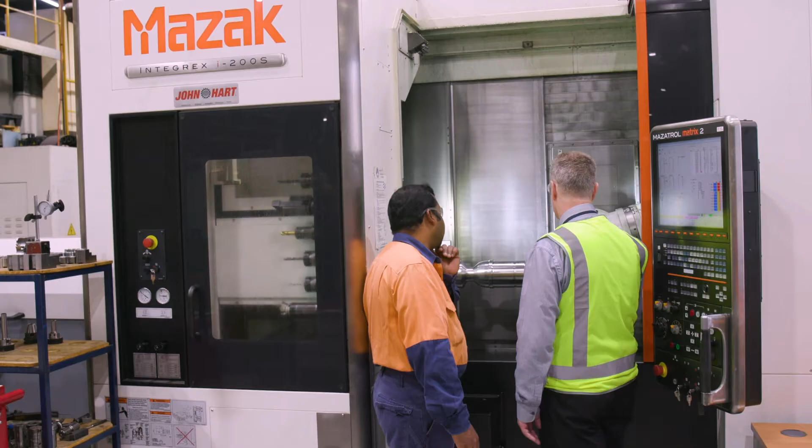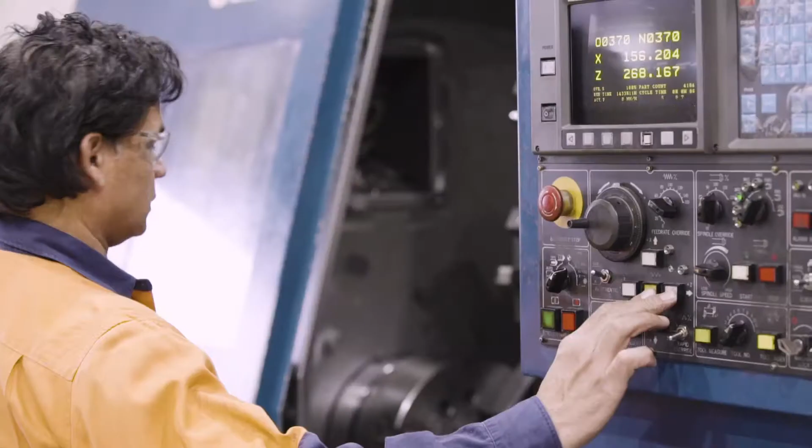Michael Borsche, the Managing Director of Amiga Engineering. We started in 1988 and we were primarily a traditional machine shop doing work for the heavy transport industry, and that developed into doing work for the oil and gas industry.

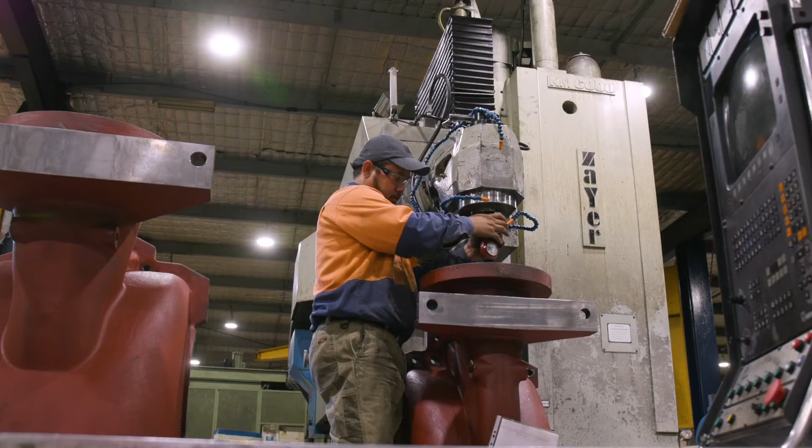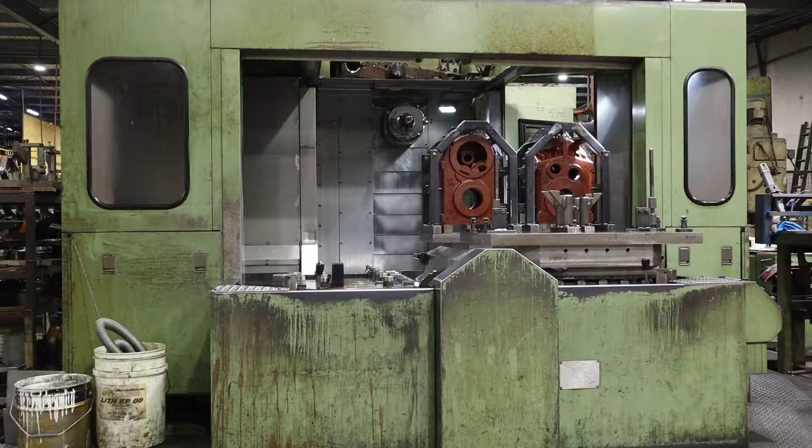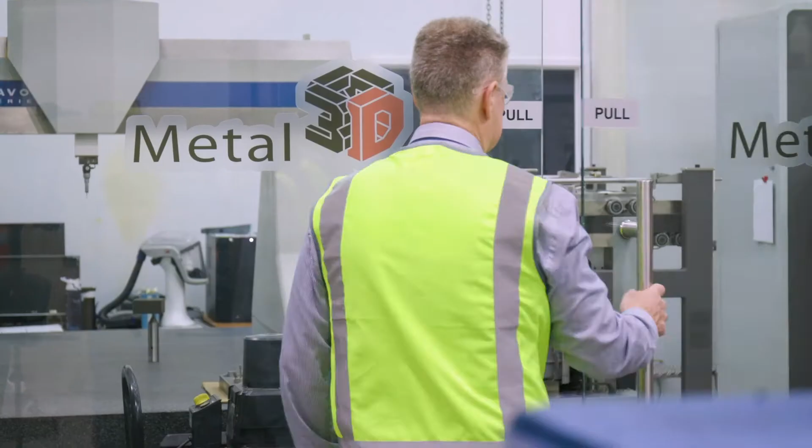And along with that we got into CNC machining and eventually built ourselves up to owning our own factory and growing. We then said, well, what's next? So we got into 5-axis machining, and on top of that we sort of said, well, what's next? And then evolved into doing 3D metal printing and now polymer printing, and now we're into reverse engineering and scanning.

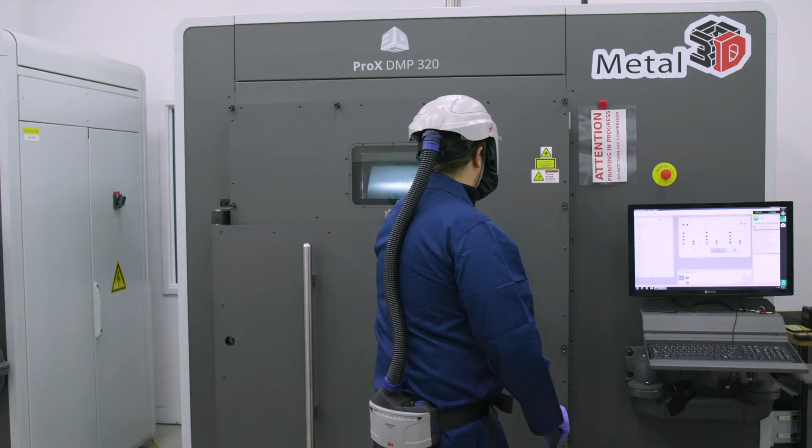Well, it's interesting. 3D printing has changed our business in a lot of ways. We were hoping it would attract a new level of clientele, and this has brought in designers and engineers more focused on what we're doing. But along with that, of course, comes a new level of quality, because you've then got to measure these complex parts. But the 3D printing in metal was certainly a great add-on to the business, and being basically the premier service bureau in Australia for metal printing, it's brought a bit of light on the business and helped us grow.

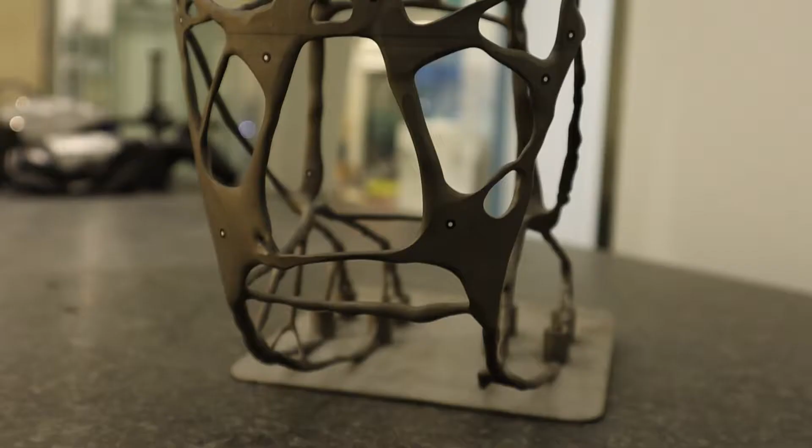Now, 3D printing being a complex technology, it's certainly made us think more about all the processes involved, and that's highlighted the ability to measure some of these complex parts. Originally, some of the earlier 3D printed parts were quite simple, but as designers were able to open up and free their minds to complex parts, multifunctional parts, so more parts in one that can do various things, it seemed to me that we needed to find new ways of measuring these parts.

Lots of curves, faces and underlying ledges and very intricate detail. Suddenly the standard measuring instruments weren't really enough. Micrometers and verniers didn't cut it. Our CMM, even which we've had for a number of years, we struggled to measure some of these complex parts, and in fact we would spend a long time programming, and we needed fairly skilled operators to run the CMM to measure some of these parts.

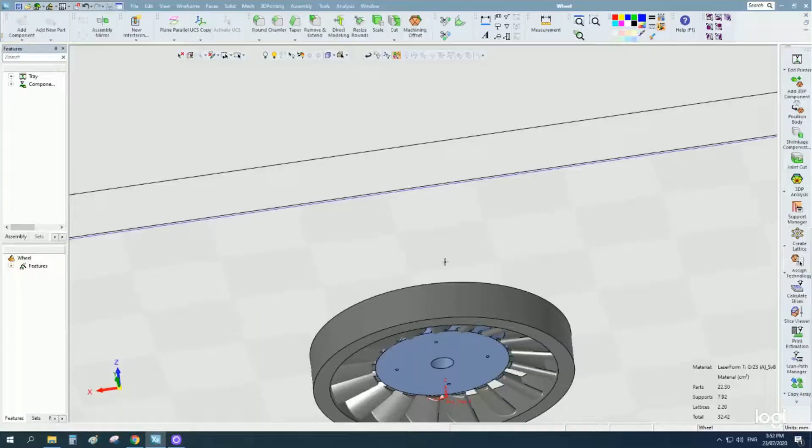Now, really the programming time is just too long, it takes a long time to get it all operational. It could be anywhere from hours to half a day, even days. We had a turbine blade recently, which we were trying to measure, and it got very, very out of hand. A lot of detail and underhanging ledges. This certainly highlighted the fact that we needed to find a better solution.

Well, really, I've watched the evolution of scanners over the years, and I've found them to be a little bit wanting. There's arm scanners, there's probes and digitisation of those, and the add-ons of laser scanners and that sort of thing, and that's been quite good. But really, to do something at a level of getting enough feedback and data for machining purposes at high level, high tolerances, it hasn't been there.

But now we've come across the ATOS Q, which has only just been released worldwide, and we're the first ones in Australia to actually get one. We've found that this is just amazing. It's down to 6 microns we can measure to, so that's really highlighted to me this is the time to get into this, and we can use it for everything we do within the business.

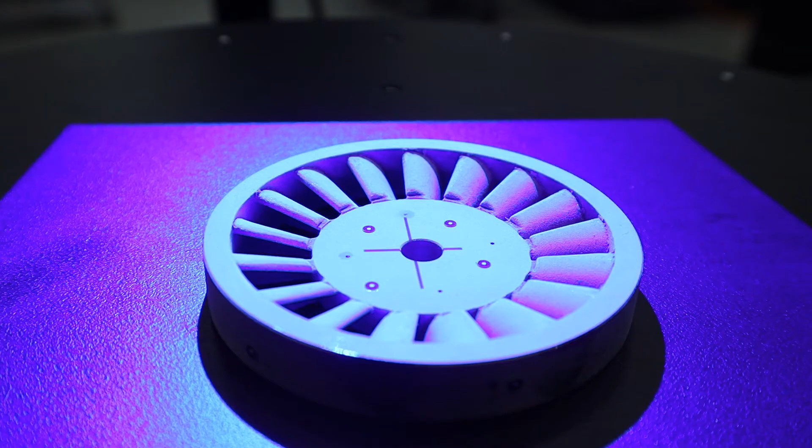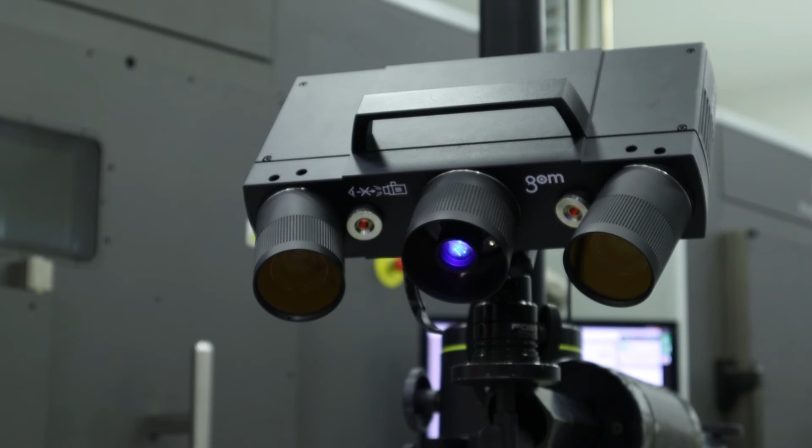Well, really, being a world first and being first in Australia was one reason to get the ATOS Q, but we were looking really for its level of accuracy, and this to me wasn't really available until the ATOS Q came out. And the ease of use, you know, I've looked at CMMs and the complexity of them, the training you need to get to an advanced level to be able to use them well. And with this ATOS Q, it's really simple. Within a few minutes, you've got a part measured, and the level of detail you get is just second to none. You'd hardly get it from the CMM.

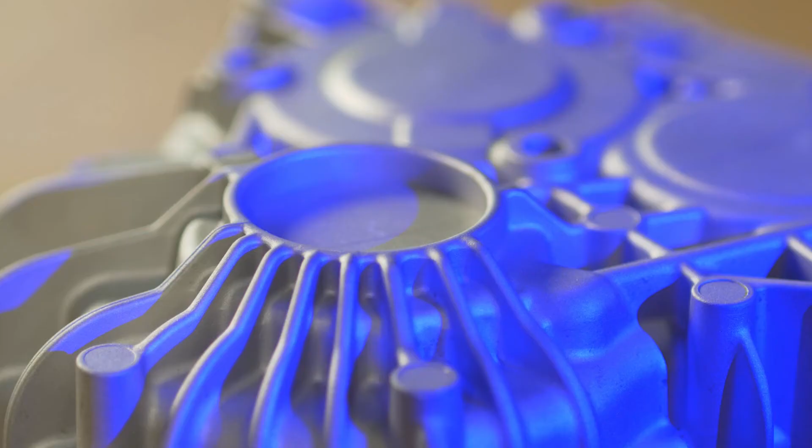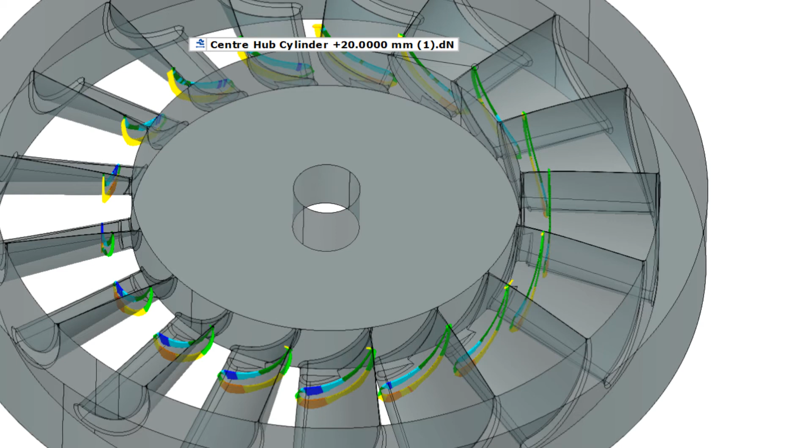We just started developing a small jet turbine engine, and as part of that, we 3D printed this part here, and scanning of the aerofoil shapes within this part certainly helped us get to the end result we needed. Previously, trying to use a CMM to measure these little blades and the curved sections and the aerofoil design of the whole part was virtually impossible. Certainly on something this small as well. Even if you machined this on a 5-axis machine, you wouldn't get the level of detail you've got in the corners and the fine edges on here. Not impossible, but very hard to do.

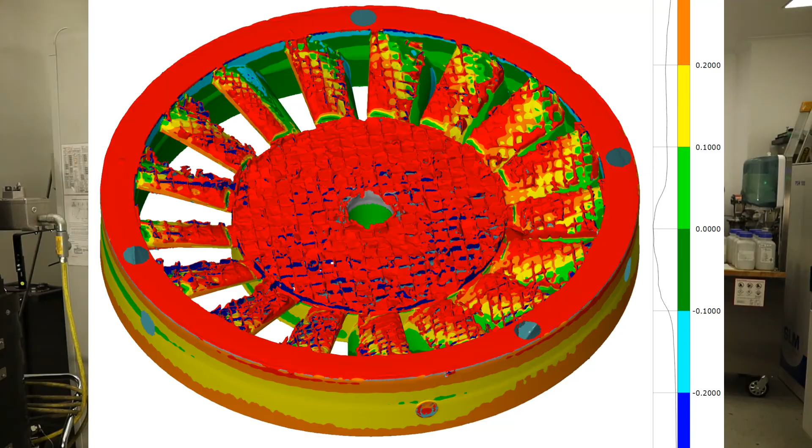Whereas obviously 3D printing and machining, and then the ability to scan this and then hand it to the machine operator with data that helps him align it in the machine to find the best setup, because we're after balance on this part. We want it to spin at high revolutions, something like 48,000 RPM, and it's got to be very balanced. So understanding where your 3D printed part is, comparing it to the model and giving that feedback to the CNC machinist is paramount.

Yeah, well, the traditional machine parts, some of the parts we do in our factory are quite large. We've got a 4.3 metre travelling column milling machine, and if we've got to measure where our machining is in comparison to other parts of the machining on, say, a large pump base or something like that, it's difficult to figure out. You can use the machine's built-in accuracy to probe it and get measurements off. But if you've got to turn parts several times, you need to really take a measuring tool to the machine. So the scanning offers the ability to do that.

We can take the scanner and we can scan the whole part, and we can see things that we could never see before. It's not just a matter of where a hole is or where an edge is or how flat a surface is. You can get complete comparisons of what you've machined to 3D models. It's outstanding.

Well, it's a fairly lengthy process. You need to have obviously a starting part, and if there's something that's become obsolete or broken, or a part that there's no longer drawings for, you can create CAD models. Scanning is one way of scanning the part and giving you back a base model to then work from.